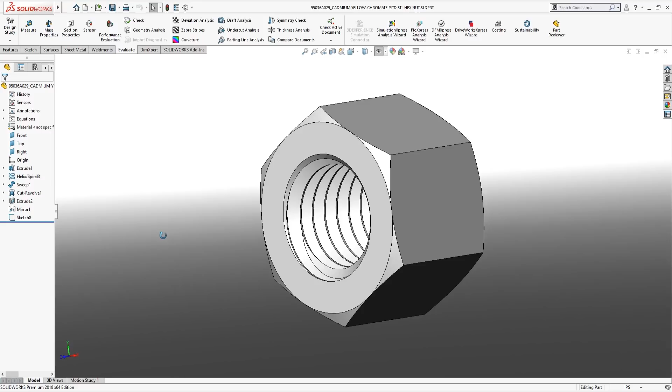It doesn't matter what anything in this part looks like, really. We want it to look like the part does, but on the inside, it's going to be mated to a bolt anyway. We're not going to see those sweeps. So if I simply suppress that sweep, it's going to be the same internal diameter, and we'll see that it loads in 0.08 seconds now. It's a huge improvement.

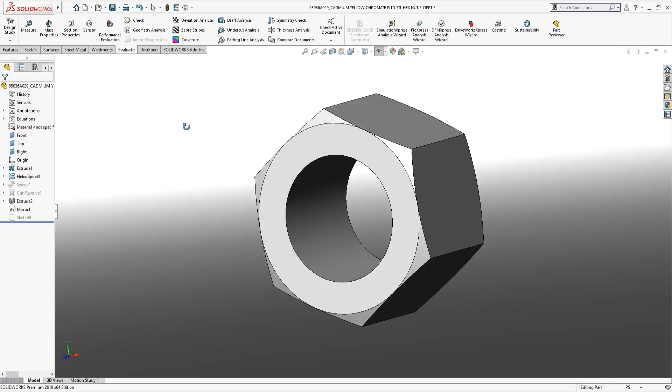Another thing that these manufacturers like to do is if we jump into options here, document properties, and image quality, they like to crank it up past 11. Even SOLIDWORKS has it shown in red, it's the danger zone. This is going to be very demanding graphically on your system.

So depending on your system, it's going to change how much or how little this is going to affect the part. But we can kind of see an example here with this circle. As I lower the resolution, it's going to load faster, but that circle is going to get more and more polygonal until at the end we're looking at a hexagon. So maybe you want to leave it somewhere down in here. It's not a part that's important.

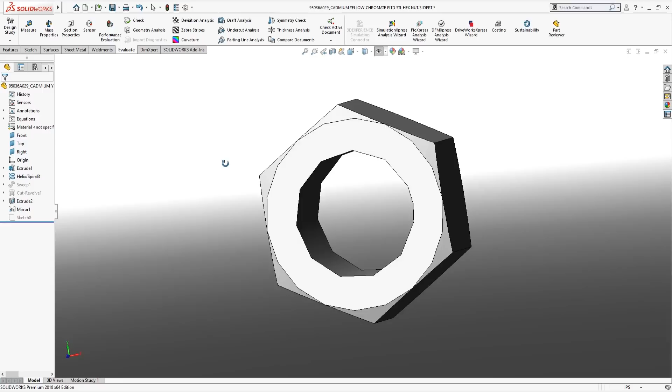So I always like to lower these fasteners and things. I'll go all the way down and show you that it really doesn't make a huge difference in the end product. Now, is this going to make a difference in our performance evaluation? On my computer, it's not. On yours, it might. It just depends on your graphics card. It depends on quite a few different things. But graphics quality, it is a very small part. So it's not making a huge difference alone.

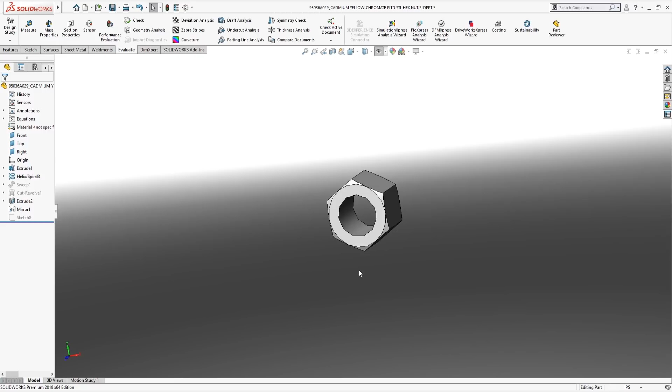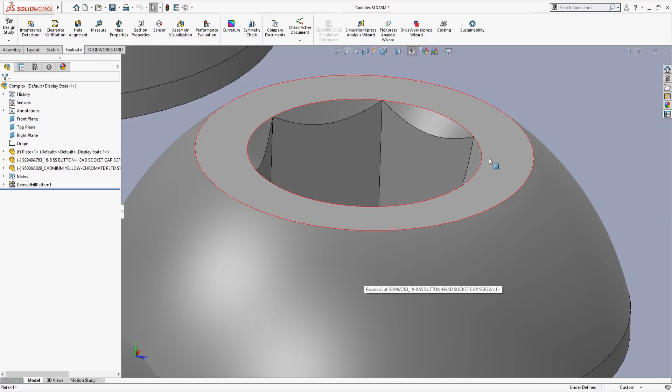But what if we look at it in the context of an assembly? So I have two assemblies here. This is an assembly with the nuts and bolts as downloaded. So image quality, as we zoom in, we can sort of see the threads are in there. We can zoom in and see everything is nice and circular, very smooth. And we can do an assembly visualization, excuse me, and look at the rebuild time here.

And we're going to see that it's not huge. You would think if each one of these complex parts took 0.6 seconds, that added all together, it's going to take far more than that. But the truth of the matter is that the way assemblies are set up, they are kind of optimized to deal with a lot of the same thing. SOLIDWORKS isn't rebuilding this each time. Assemblies have come a long way, and it's not just an addition.

The difference comes when we have many different fasteners. So we have washers, we have nuts, we have bolts, we have lock washers, we have wing nuts, we have 18 different sizes of all of those things. That's when you're going to see a huge change in this rebuild time and this load time. The load time is longer than the rebuild time, so that's the first time you open it. And we can see it's a little more than half a second.

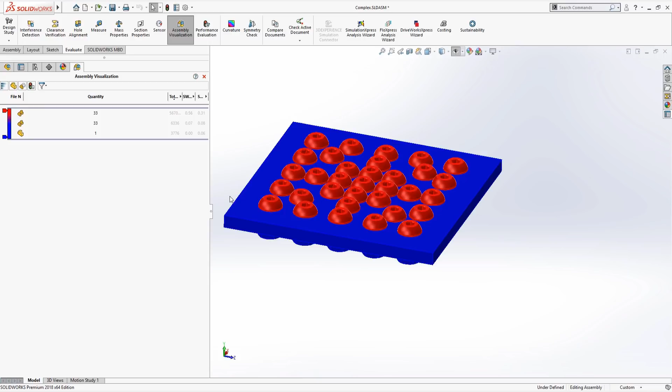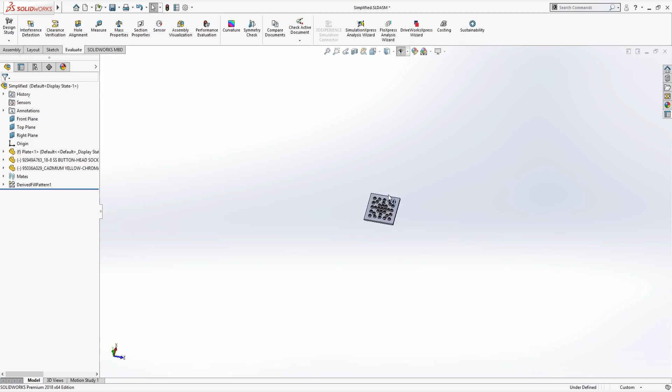But if we look at the simplified configuration, from a top view, it looks about the same, but these have all been very simplified. As I zoom in, you can see it's very polygonal. It's not very smooth, but from out here, it looks the same to me. Especially when we're out at a level like this, where we're seeing these nuts and bolts very, very tiny because there's hundreds of them in the assembly.

And the rebuild time on this is significantly lower. It's about 0.2 seconds versus 0.7. So, 3-4 times faster on just a really simple part like this, a really simple assembly.

So this has been a quick overview on just how to make your manufacturer parts that you download perform better in an assembly. If you have maybe just one or two types of nuts and bolts, it might not be a huge deal to you. But when you're building a very large assembly, this is especially important when you're getting over 30,000 parts or pushing the envelope on an older graphics card.

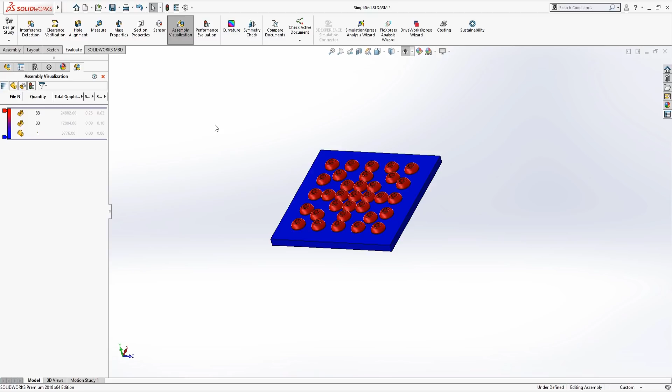You're really going to want to take some of these tips to heart and just reduce that image quality, take those sweeps out. It doesn't hurt anything, it looks the same. Everyone knows this is a nut and a bolt. The bill of materials are going to be identical. So that's my quick tip for today.

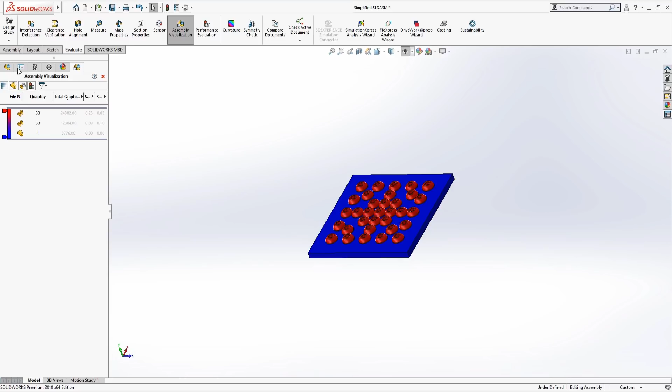If you're wondering how I got these in, I did not manually mate each one of these. I used what's called a pattern-driven component pattern, otherwise known as a derived fill pattern, based on the original fill pattern. And that will be the topic of my next video.